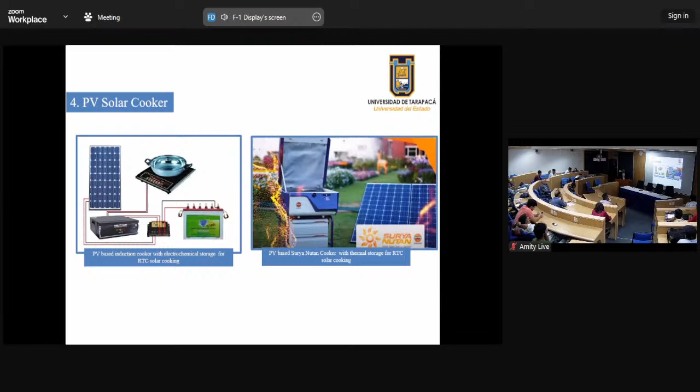Then PV cooking, as we know, PV giving electricity to the induction cookers, and they are generating required voltage and current to get the heating cooking done. Surya Nutan Chulha is one of that type.

Then applications. There are different applications of different cookers: boiling type of cooking, then frying type of cooking, baking type of cooking, roasting type of cooking, and these all have different temperatures. Boiling type of cooking like rice, we have 100 degrees centigrade. For frying, we need 120 to 180. Baking is around 190. Roasting, 200 and more than that.

So whatever the box type cookers or advanced cookers or concentrating cookers, they operate at different temperatures. Box type cookers are generally preferred for low temperature cooking, like 100 degrees centigrade.

Then concentrating cookers, they can reach up to 300, 400 degrees, depending upon their size and shape. Particularly when used for community cooking, the temperatures can reach around 400 degrees centigrade, depending upon their size and shape. Then advanced RTCs, there is again no limitation for getting the temperatures.

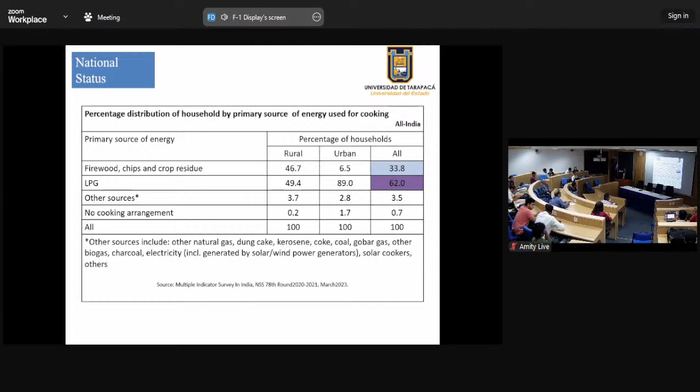Other sources like natural gas, dung cake, and kerosene are also used for cooking. So what are the attractive features of the solar cooker? Why is it important in today's era of decentralized energy solutions?

A lot of people are now working on solar cookers. They are trying to develop different designs. Different designs are available, different geometries, different shapes, as well as different types of cooking pots are being developed. So we have attractive features related to solar cookers, as these are, what we can say,

it belongs to the sustainable development goals. Gender equality is one of the major concerns. There is no limitation; both women and men can cook. Then it checks deforestation; it will reduce deforestation. Then carbon credit for cooking is available.

Even United Nations Development Programme is funding different cooking programs all over the world, including India, Latin America, all African countries, all Arab countries. These types of incentives are available. Reduce household air pollution. The Ujjwala scheme was launched by the Government of India for that purpose only, to reduce indoor pollution.

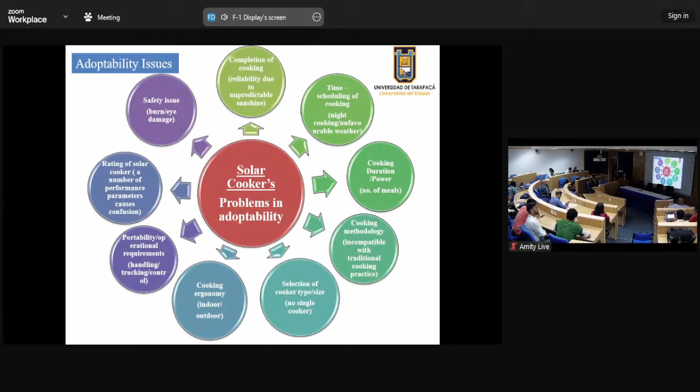Then most important, how to rate and grade these cookers. Even though all types of designs are available in the market, the parameters available for testing solar cookers are at low temperature only. We will see in the next slides.

Indian Prime Minister Narendra Modi ji sees a big opportunity for solar cooktops in India, officially endorsed by flagging off Indian Oil's patented Surya Nutan Chulha, and they are now transferring the license to different people for that purpose.

So what is happening with this? All these types of solar cookers are available. Profitability and portability issues are there. Despite that, there are different parameters available for rating and grading solar cookers. Thermal performance parameters are used to evaluate the thermal performance of different designs of solar cookers: box type, dish type, and panel type. TPP enables users, manufacturers, and the research community to identify a cooker according to a unique number.

Again, we know cooking is a physico-chemical process, and it occurs over a fixed temperature. If we take rice as a food, which is the largest food consumption all over the world, rice is available in every part of the world. So the pasteurization temperature of rice is 69 degrees centigrade. If a cooker is not reaching 69 degrees centigrade, then that rice cannot be cooked.

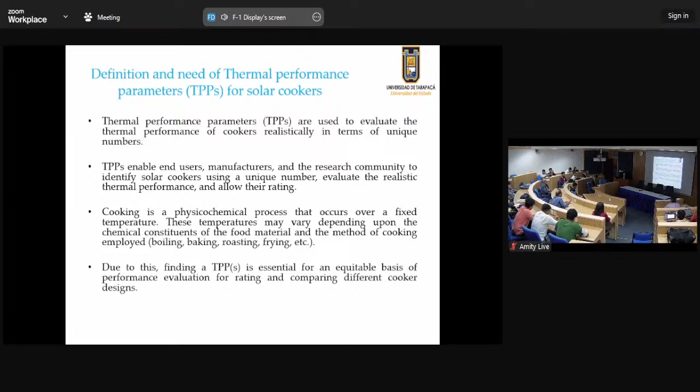And again, cooking time and type of design required depend upon what type of cooking we are doing. If we want to fry, if we want to roast, if we want to bake, the temperatures are different, as I indicated. Due to this, finding thermal performance parameters is essential. For an equitable performance evaluation and rating of different designs, we need different performance parameters. So what are these parameters available in the published literature?

First, figure of merit, F1 and F2, developed by Professor Mullick from IIT Delhi in 1987. These are available for testing box type cookers. Then cooking power, standardized cooking power, developed by Professor Funk in 2000, and it is converted into American standards and ISO standards. Then, as we know, all solar collectors can be tested with thermal efficiency.

Then we need a time for cooking. Again, there are three different times. Pasteurization temperature time is different. Simmering temperature time is different. Cooking temperature time is different. So time is one of the parameters that we can consider. Then heat loss and heat loss factor, optical efficiency factor, concentration ratio, all these parameters need to be taken into account while testing the performance of solar cookers.

And the parameter that we developed is called the cooker opto-thermal ratio. It was invented in 2012 by our team, my professor. Then there are different objective parameters also. First is maximum achievable fluid temperature: what maximum temperature can the cooker reach on a given day? What is the reference time, the time required for a given cooker for cooking? That may be boiling type, baking type, or roasting type.

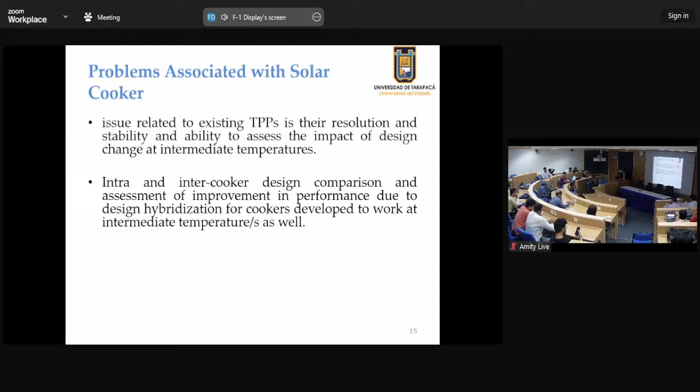Then again, quantification of test load. Whatever test standards we showed, figures of merit, heat loss and optical efficiency factors for dish cookers, cooking power, different standards give different quantities of test load to be used in the cookers. According to the figure of merit box cooker standards followed by the Bureau of Indian Standards, they suggest 8 kilograms of load per square meter aperture area of the cooker. Then the cooking power standards, regarded as an ISO standard, suggest 7 kilograms of water as a test load.

Then we developed CCOR, the cooker opto-thermal ratio. We are taking load as 2.5 kilograms of water according to different conditions. That is why quantification of test load is important in solar cookers. Why is it important? The higher the load, the lower the temperature limits reached for a given cooker.

So one person is using 4 kilograms of water, another person is using 8 kilograms of water, and the heat transfer characteristics definitely change. The same cooker can give different parameters. That is why uniform loading of a cooker is important. It justifies appropriate quantification of the test load for a given cooker while measuring and calculating the test parameters.

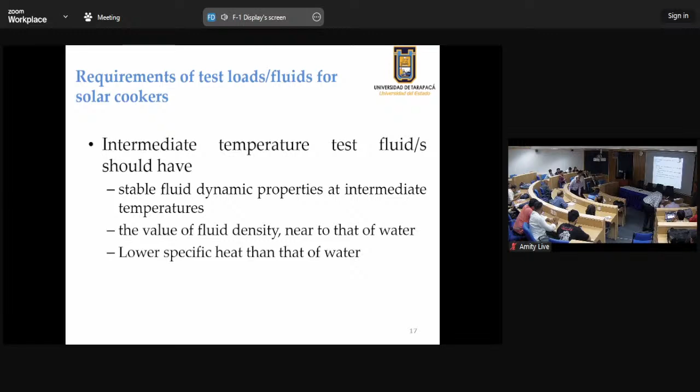For that purpose, we need fluids that have stable thermodynamic properties at low temperature as well as high temperature. It should have specific heat capacity less than water so that resolution can be visible, and the fluid density should be near that of water so that it can maintain the density throughout the experimentation.

So I discussed this according to CCOR, which we call the cooker opto-thermal ratio. We suggested load to be taken in heat capacities, not in kilograms. So according to CCOR standards, 10.46 kilojoules per degree centigrade per meter square aperture area is the load suggested, and it is named specific sensible thermal test load, SSTL.

Why is it taken? Initially the load is calculated in terms of water, 2.5 kilograms of water times the heat capacity of water. It goes to around 10,500 per meter square aperture area. Then we kept the heat capacity the same and reported two new test fluids which have stable thermodynamic properties at intermediate temperatures. First is diethylene glycol, second is glycerin.

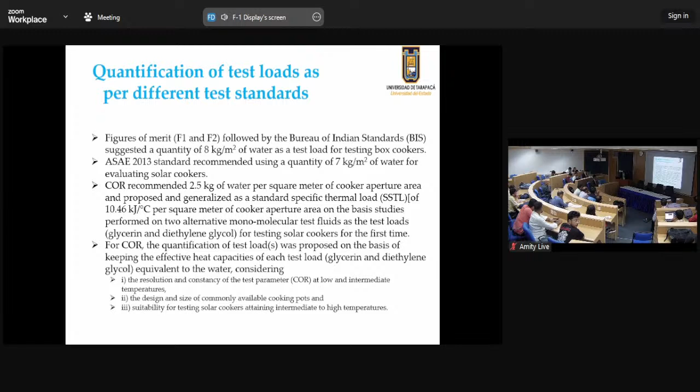These two fluids are monomolecular fluids. They can be manufactured anywhere in the world, and they have stable thermodynamic properties at low as well as high temperature. But later we found diethylene glycol has some toxicity, so we dropped diethylene glycol and concentrated on glycerin as a test fluid for testing different designs of solar cookers at low as well as high temperatures.

Then what are the limitations, or some comments about figures of merit? What is happening with the test parameters for the cookers? These figures of merit are being used for hybrid cookers, though the test procedures given by the Bureau of Indian Standards and Mullick sir don't suggest use of F1 and F2 figures of merit for hybrid cookers.

Now cookers are being made with thermal storage, with some electrical backup, some other type of system, and they are being tested with the figures of merit, which gives a wrong quantification for a given cooker, because whatever hybridization we are doing is not taken into account while testing.

The same is the case for dish cookers. Dish cookers are being tested with the no load test, that is figure of merit one, suggested by Professor Mullick and adopted by the Bureau of Indian Standards. It is a no load test, to be taken with a bare absorber plate of the box cooker. And despite that, dish cookers are being tested with the no load test, F1, F2. Again, it is misguiding the research community.

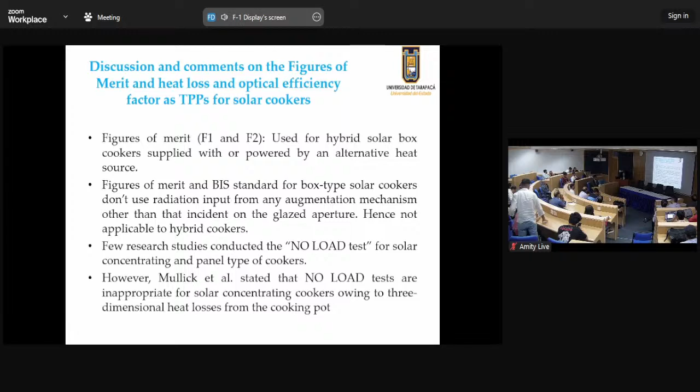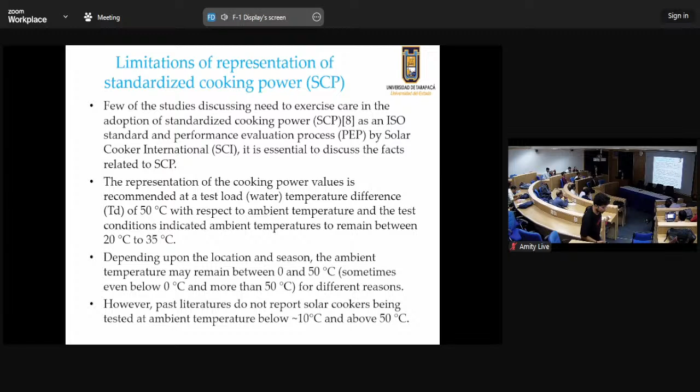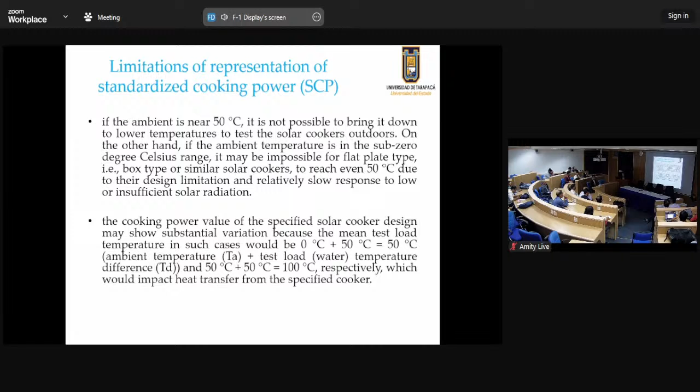So there are different limitations for the cooking power. On this we wrote one article recently in Sustainable Energy Technologies. You can refer to that. Because of time limitation, I am moving fast.

Energy analysis: I said we have to take maximum and minimum efficiency for a given cooker or a given thermal collector, because efficiency is mainly dependent upon the temperatures. At low temperature, high efficiency; at high temperature, low efficiency, that we know. So it cannot be used as a thermal performance parameter for the cooker efficiency. Same as F1, F2, figures of merit, then heat loss and optical efficiency factor, cooking power, all are defined at low temperature.

It is causing non-uniform, inconsistent use of the test procedures for determining the TPPs, resulting in anomalies in solar cookers, and subsequent rating and grading of the solar cookers and standardization. For that purpose, we have defined a cooker optothermal ratio. It is a ratio of optical efficiency factor to the specific heat loss factor: F' η0 divided by F' UL / C. F' is the heat exchange efficiency factor.

It has been developed based on a single step procedure. You can use any fluid, water, glycerin, glycol, oil, and you can test a cooker. But generally, as indicated to you, glycerin is preferred as a monomolecular test fluid, which has a boiling point of 290 degrees centigrade. And with that, anyone can test any type of solar cooker reaching intermediate temperature of 120 to 300 degrees centigrade.

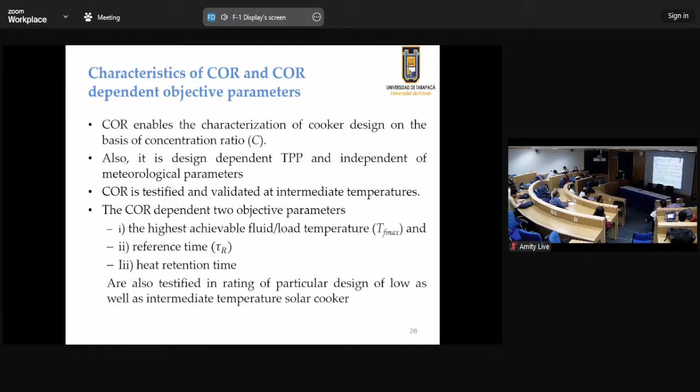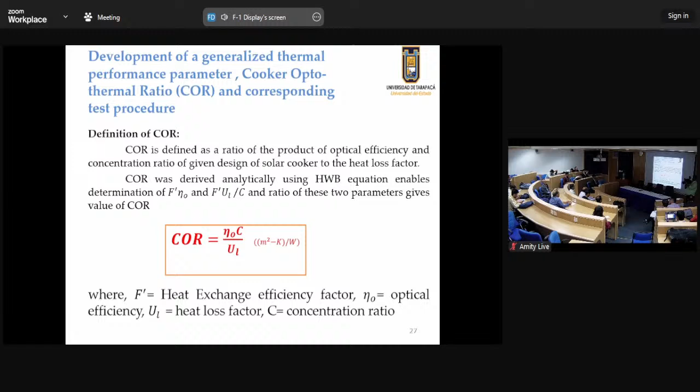So what are the characteristics of the COR? Here you can see C is coming into the picture. C is the concentration ratio. Once the concentration ratio comes into the picture, you can use this parameter for any type of solar cookers. Depending upon COR, we define different objective parameters: maximum achievable fluid temperature, then reference time, then heat retention time, then levelized cost of cooking meals, and carbon mitigation potential.

Based upon COR, you can test and evaluate a cooker holistically, because it is giving all types of parameters. It is giving maximum achievable fluid temperature theoretically, and you can validate it experimentally. Same is the case for levelized cost. Same is the case for carbon mitigation potential. All these parameters use COR as a test parameter for the solar cookers.

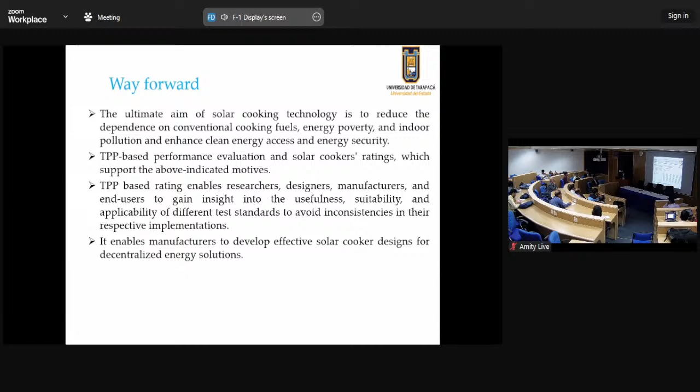So this is the way forward, future works that we are planning now, to identify and find new pathways for COR for advancement in future existing designs and hybrid cookers. Now we are going to apply COR for hybrid cookers, maybe with electrical backup and some other hybridization techniques like heat transfer fluid based cookers. Also, we are trying it for Scheffler. Then to enhance the use of COR to the research community, product designers for appropriate rating and grading of solar cookers, to develop standards based on COR.

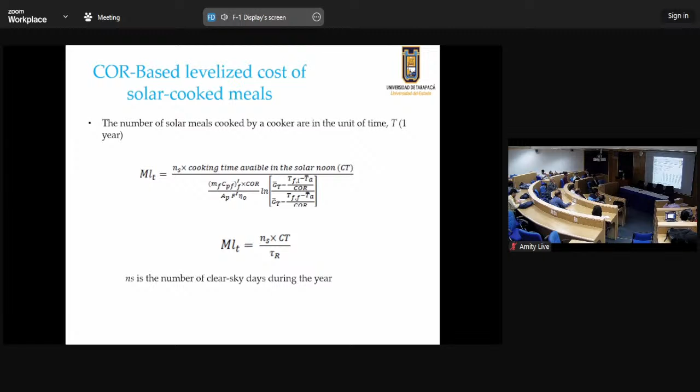Yes, sir. Yeah, yeah. Yeah, yeah.

Yes. Where in the equation of COR, we are COR basically depends upon COR is derived from HWB equation, Hottel-Whillier-Bliss equation. We have the G value there, GT value there. Yes, exactly, the temperature difference divided by G.

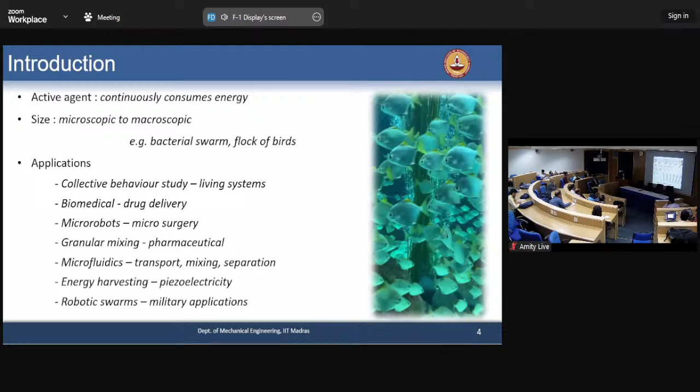When we talk about passive systems, this means they don't have any self-propelled force, so they will not move by themselves. They can move due to the presence of other active agents, but they will not move directly. That's why there are systems which are a mix of both active and passive particles or passive agents.

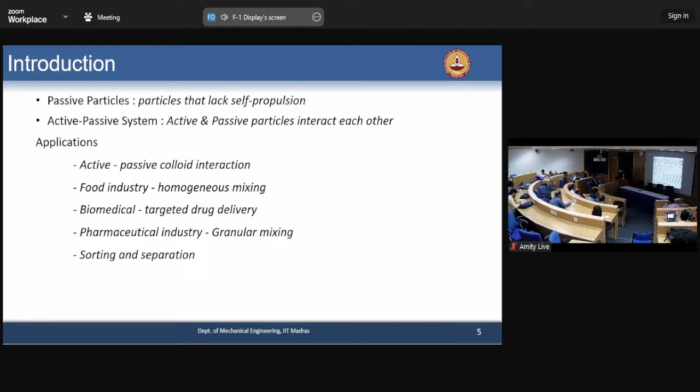So there are systems like active-passive colloid interactions, like in the food industry for homogeneous mixing using robots. For biomedicals, like targeted drug delivery, cargo delivery; and for the pharmaceutical industry, granular mixing, sorting and separations are a few examples of that.

When we talk about all these systems, there are a few system characteristics we have to discuss. One is self-propulsion, how these agents are moving. And when these agents are moving to show collective behavior, they have to align with their neighbors. There will be alignment with the neighbors, and there can be attraction among the constituents, or it can have some repulsion. It can have some resistance against the propulsion.

Mostly in nature these are stochastic, so there is stochasticity involved. It will not align perfectly, so there will be some noise.

When we talk about system behavior, we will see collective motions like swarming. There can be phase separations - if there are differences in speed or differences in sizes, we can see some phase separations among the active systems. There can be localized cluster formations, segregations or aggregations, or sometimes we can see mixing.

There are different models available. One classical model is the Vicsek model. Then there are active Brownian particle models, or ABP models, when we talk about Brownian dynamics. There are run and tumble models, particularly when we talk about bacterial motion - if we want to model it, we generally use a run and tumble model, so if the bacteria runs for some time, then it tumbles, then runs again, and so on. There are active nematics, Toner-Tu models, social force models, etc.

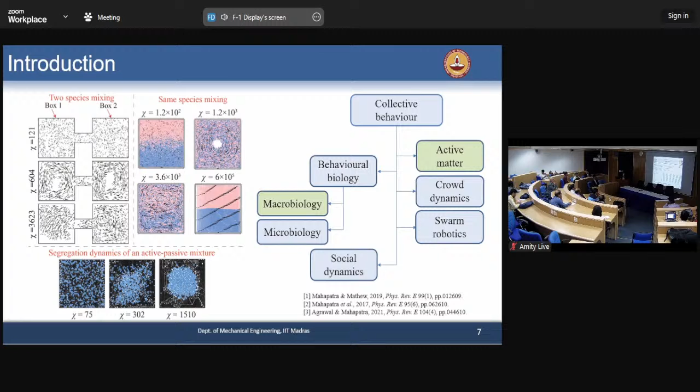We worked a little bit on crowd dynamics, but today I will not talk about crowd dynamics - though if you're interested, I'll be happy to discuss it. So regarding the model, mostly I will talk about numerical modeling here.

The experimental part I will not show today.

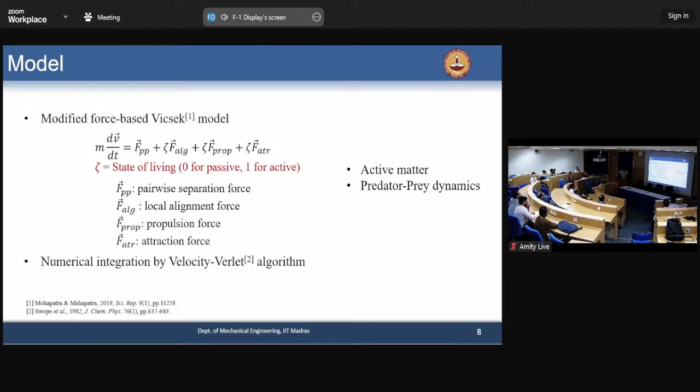So this is a modified version of the Vicsek model, where there are two states, because this is a generic model, so we can include both living as well as dead systems, like active and passive systems. So this parameter zeta will take care of that.

So the main forces are pairwise separation force, local alignment force, propulsion force, and attraction force. And we integrated this using a velocity Verlet algorithm, something similar to what we generally use in molecular dynamics.

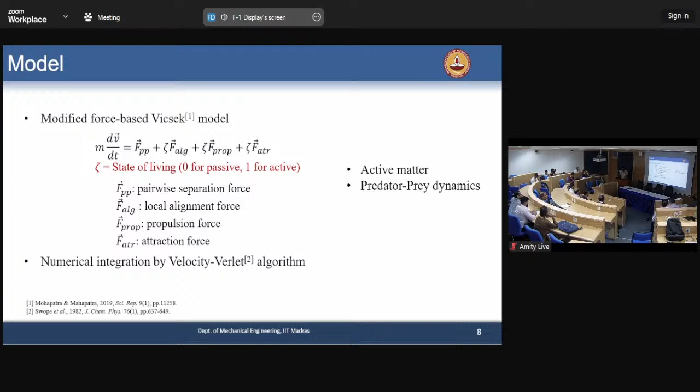So this mainly we talked about active matters and predator-prey dynamics. I will talk about this predator-prey dynamics in detail afterwards.

So regarding the propulsion force, when we have a single active system, then it will have only a cruising state. But if we have, let's say, a predator in the system, then it will have both a cruising state and an escape state for the prey, and for the predator it will have a pursuit state. That means the predator will chase the prey, and due to that the prey will escape. So it will have a different velocity compared to when it is in cruising state.

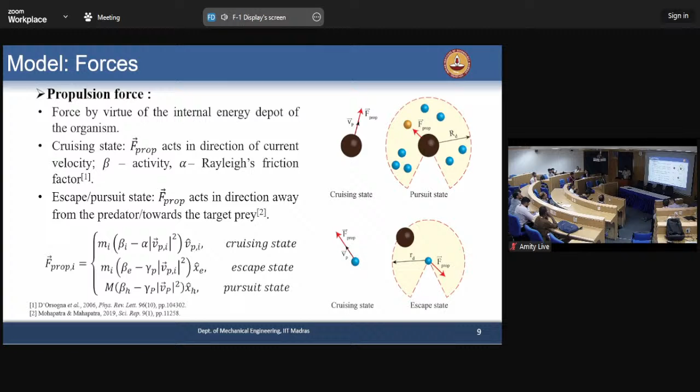And now if it is a pursuit state for the predator, it will chase the prey, so it will align towards the prey. If it is an escape state for the prey, it will try to move away from the predator. If we remember this, I think we'll be able to discuss this further.

So now there can be an attraction force. This is not important when we talk about only an active system. This is important for a prey group, for an isolated prey to come into the prey group. So let's say a prey which is becoming isolated in some situations, it will come back to the prey group. That's what these forces, the form of the forces, has been taken from different experimental papers. So they observed this in nature, and based on that, these forms have been taken.

There can be a pairwise separation force. This is particularly important for a biological system, so that they will not overlap. It's like a soft disk, so if they overlap, there will be a repulsion force. And this will work only when there will be a possible overlap, otherwise this will not work. So it's like a pairwise interaction. If it overlaps, then there will be a repulsion force.

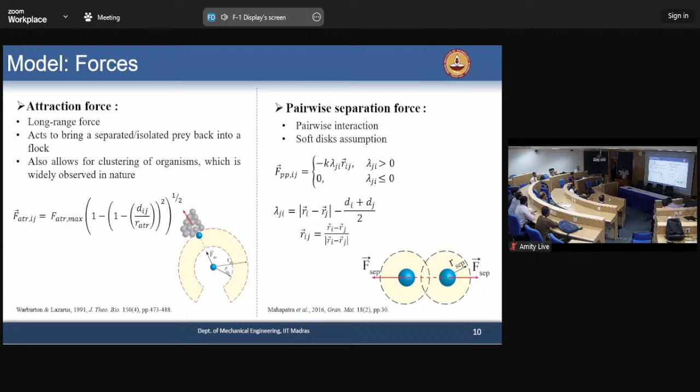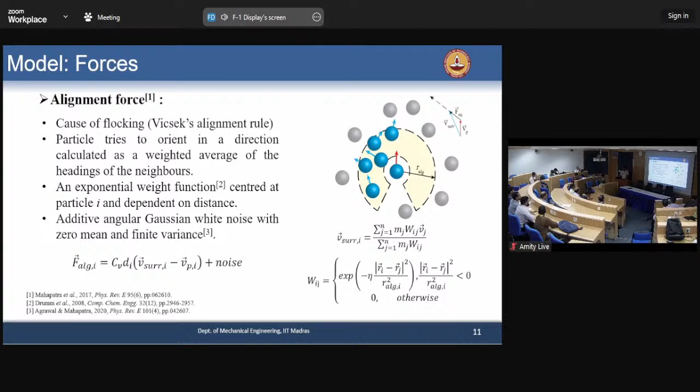So now if we try to understand what the control parameters are, because there are a lot of variables. If we try to understand what parameter we can control, so that there will be only one or two parameters which we can modify and try to see the overall behavior.

So first, if we compare the alignment force with the self-propel force for a single particle, we can write an equation like this. And now if we do a scale of the slip velocity, the velocities can be scaled as m beta by dCV, and finally we get a scale parameter. This is like an alignment force to the inertial force. So this will give the relative importance of the alignment compared to the inertia of the particles.

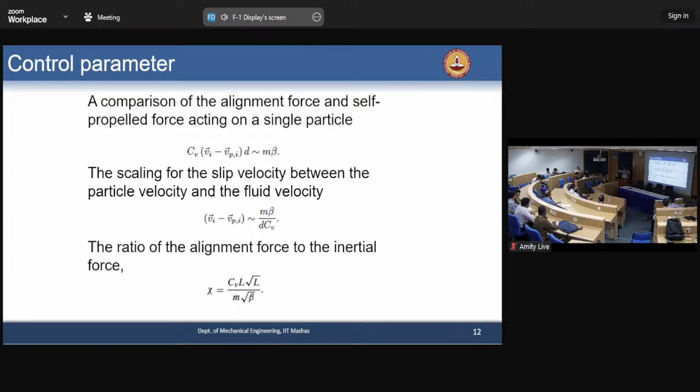So this parameter chi we are varying in our simulations, and we are trying to see whether a completely random system can be brought to a collective motion. So that's what we started with. Say for example, for a very low chi value, you can see it's like thermal motion or Brownian motion initially. But when we increase chi, you can see the second panel where it shows some rotating behavior.

It's called milling. This type of behavior has been observed for bacteria when they are confined in a system. All these simulations have been done in a confined system, so there is a boundary. Due to this effect of the boundary, it started rotating. So you can see we can have a single mill or a double mill depending on the regime; this is a very unstable situation, that is 3.6 into 10 power 3. In that regime, we have an unstable system which will show a double mill.

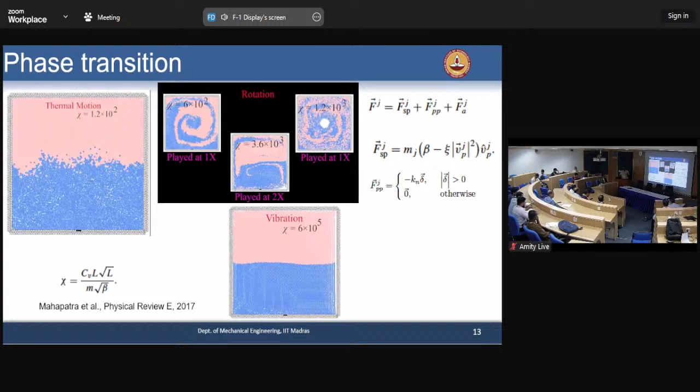And if we increase chi further, it will align so much that it will just oscillate. It is like a vibratory motion in the system. So here mainly we have considered the self-propel force, a particle-particle repulsion force and the alignment force, and the form of these forces is the way I have discussed before. So this is what we have seen.

These are the particles. All are the same particle, all are active. Just to understand how it is mixing within it, we have given a blue and pink color. And these are the velocity vectors drawn on top of it. So you can see initially it is all random motion when chi is very small, and slowly it goes into a milling motion, and finally it is just oscillatory motion within the wall.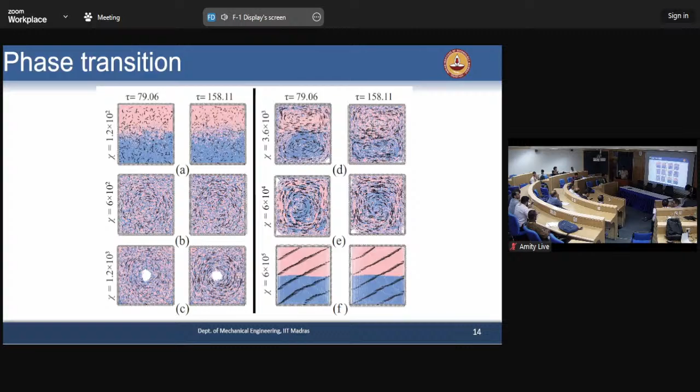So after understanding this, that it is possible to create a system which goes from Brownian to oscillatory with milling in the transition, we have done a little more detail of that. I am not going into that. So we want to see how the behavior will change if we have passive particles, whether it will be able to mix because of these active particles, or it will show some other behavior.

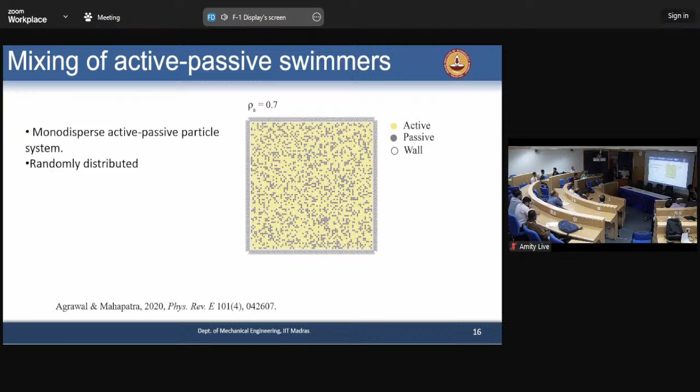So this is a monodisperse system. We did a polydisperse system also, but here I am showing only the monodisperse cases, where the gray are the passive particles, yellow are active particles, and these are the wall. So this is also a confined system, and these are randomly distributed, and these are the scaling parameters, everything I have shown before, the similar chi parameter, so only one parameter we will change, and we will see how the behavior changes. What we have observed is something similar to before.

If we increase chi, it will coordinate well, and it will show a collective motion. From random motion initially at a lower chi to a very coordinated circular motion at a higher chi. So at low chi we will have a random motion phase, at higher chi we will have milling motion, and at very high chi we will have a kind of oscillatory motion. So the behavior is almost similar, although the values will change at a critical chi where it transitions from random motion to milling motion. But otherwise the behavior is almost similar, whether it is a pure active system or an active and passive mixed system.

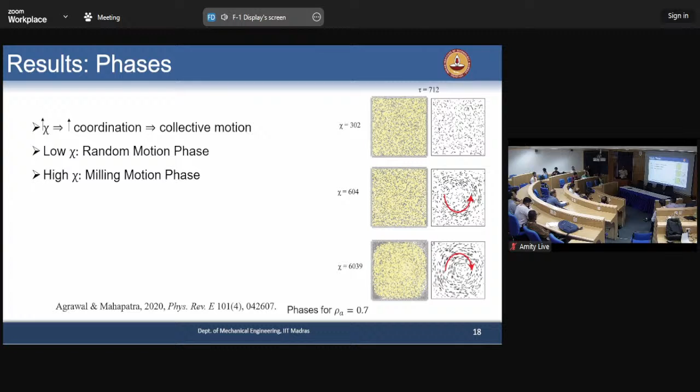So then we try to understand whether we can see the phase transitions. Can we quantify the phase transitions? So we converted from a Lagrangian based system into an Eulerian system and calculated the viscous dissipation, because we know the velocities. This is an established way of identifying the dissipation rate with time. This is not something we have done for the first time; there are papers before, so we have taken it from there. What we have identified is that this random motion changes to milling motion at a critical chi, and we call it chi c.

So if it is less than that chi c, it will be a random motion. If it is more than that, it will be a milling motion. And this is a first order transition.

So to identify whether it's a first order transition or a second order transition, we have to run simulations with a varying chi. So for example, we go in the forward direction by increasing the chi, and then we come back by decreasing the chi in different simulations in steady state cases. So you will see a loop, as you can see in the inset.

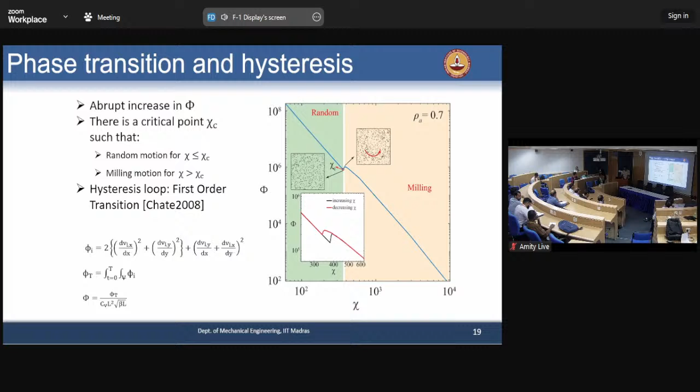So if you can see a loop or a hysteresis in your control parameter or order parameter graph, then this is a first order transition, which has been reported earlier, Chate in 2008, that you can identify that as a first order transition.

So after doing this, we try to see, okay, we have added some active particles with different passive particles. Can we change the packing fractions of the active particles, and does that have implications for the overall transition? And it has.

So if we decrease the active particle concentration, the critical chi that changes the random motion to the milling motion goes up. And if we decrease it, the overall effective alignment also decreases, and we can plot that chi c based on the effective rho. Okay.

So now after understanding this as an active system, we thought to understand what will happen to the behavior when there is a predator, because now the system will be much more complex, because we have all active but of different types. One can consume the other, or even if we consider a non-consuming predator, it can kill it. So it will be initially all active, but it will become passive when it is killed.

And we are mimicking situations where it is a continuous attack or a sustained attack. It's not a single attack, but a sustained attack by the predator. So if you see this video, this is a fish school where there is a shark, and this fish school is avoiding the shark. So this motivates us to do the simulations.

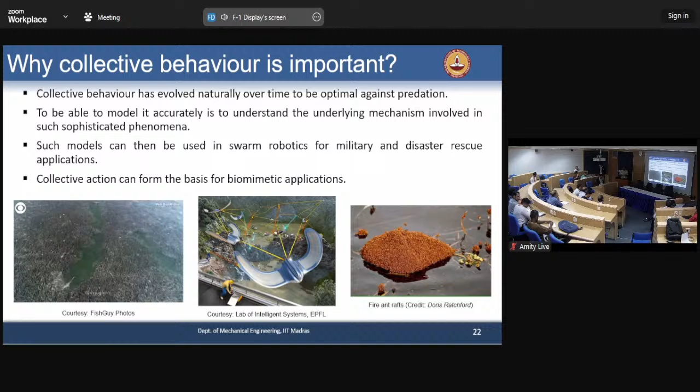For example, these fire ant rafts on the water: they collectively come together, create the rafts, and cross the rivers. So in these cases, as I said, it is slightly more complicated because we have a predator. So there are different zones of attack and zones of identification of the prey.

So for a predator, there is a zone of killing surrounding the predator, and it has a zone of detection in which it can detect the prey. It cannot detect the prey everywhere in the domain. For the prey, similarly, prey can also detect a predator. Prey has an alignment zone in which it will align with the neighbors. It will not align to very far away prey. It will align only up to a zone.

And to mimic it as close to the natural system as possible, it will not have 360-degree vision, but will have a blind angle. So we have given a blind angle of 60 degrees here, but it's a variable. We change it for different angles. So this is our basic algorithm.

First it will detect, then it will select the target, and it will pursue it. If the target is within the kill zone, then it will be able to kill, then it will have a satisfaction zone, and it will again go back and do the same thing. If it is not able to do that, and the maximum time given for the predator to search is over, then it will have a refocus state, it will wait for some time and then again start that process.

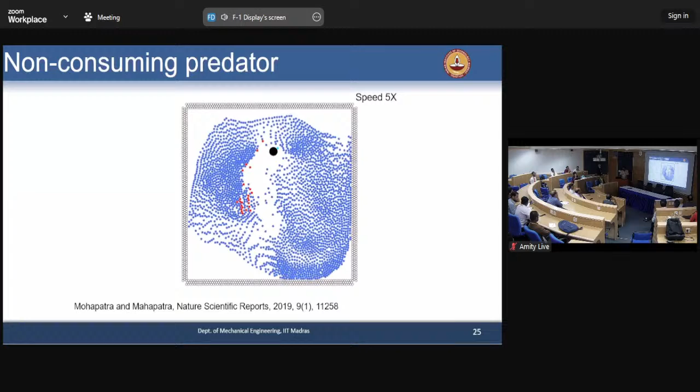So now this is what we have observed. We have observed behavior like split and join. The prey will split and then join back again. It has shown the fountain behavior and so on, which has been observed before in nature, particularly in experiments.

So then we have defined an order parameter, which is a velocity based order parameter, and we have seen that with the increase of chi, it is more ordered, and the overall killing rate changes based on the increase of chi. I will discuss this in slightly more detail afterwards.

So now, how can a predator select a prey? Till now, in single predator systems, we have implemented only that it will select the nearest prey and kill it, which is more common in nature. But there are three possibilities: the predator will select the nearest prey, or it will select the isolated prey, or it will select a central prey.

In the central prey case, it will select only the central prey, and it will try to break the prey group, like what you are seeing in that video of the shark moving in the fishes. It is selecting the center and trying to break it into smaller groups. This is a very common tactic when predators hunt in a group. A few of the predators will try to break the group into smaller groups so that the other members can attack the prey and have more successful killing.

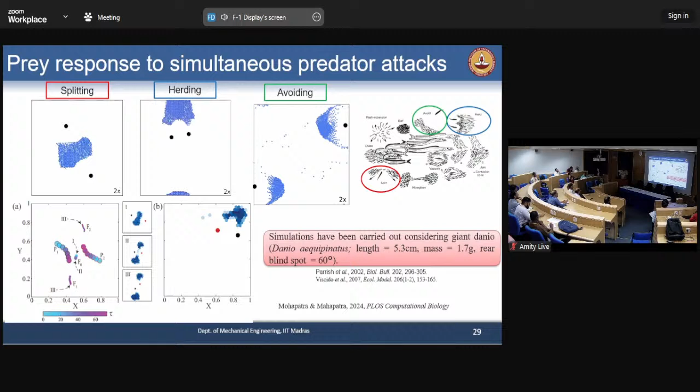It is choosing there randomly with a probability we have given that it will choose either the nearest or nearest central type of thing. And we are simulating a danio fish, which is a variant of a zebrafish. These are the mass and blind spot for that fish. So it has a 60-degree blind spot, so we mimicked that. We have tried to take all the parameters, like actual parameters that are possible.

It started high, this is a part of the simulations where it is in a polarized state, it comes down into a confusion state, then slowly recovers in a recovery zone, and then goes back to its polarized zone again, which we are seeing in the different insets. Because of the time, I am not going into detail, but we can discuss it afterwards. And these are the corresponding velocities of that state. The velocity is on the secondary y-axis and the polarization on the primary y-axis.

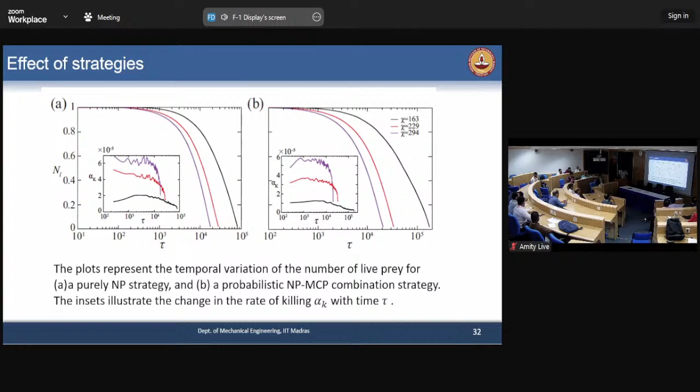So I think I will take just one thing. Now, let's compare what will happen with a single predator compared to multiple predators. We have done only up to 2 predators, because more than 2 is slightly more complicated and takes more time, so we have not done that yet. But what we have observed is it's not additive. The number of kills, or the time taken to kill individual prey with a single predator compared to 2 predators, is not additive. It is more than 2. That is one of the key observations from our study.

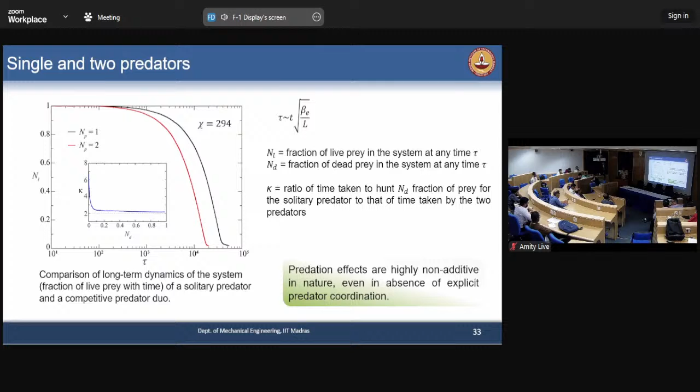Now this is very important, particularly for group hunting. That's why generally group hunting is preferable in the wild rather than single hunting, because in single hunting the failure rate is very, very high. That's why wolves and dogs hunt together. So it can mimic a few of the things we observe in nature. Predation effects are highly non-additive in nature, even in the absence of explicit predator coordination. Currently we are working on coordinating predators, which is slightly more complex, particularly the probability and the stochasticity involved in it.

So in summary, for these flock groups, we have observed that the dynamics of the flock response are quite different in case of attacks by multiple predators. Multiple predators bring in new observables to the system whose dynamics are not well researched, particularly these two-predator systems. There are only a few works, and numerically we are probably the first group who did a detailed study on that. And the effect of predation is non-additive by nature, even in the absence of explicit coordination.

And the superfluous alignment among prey can lead to reduced speed, thereby resulting in higher prey mortality, especially in the case of sustained predator attacks. So for the future, it is more interesting to see, if we have coordinating predators with a sustained attack or some delayed attack, how it will be for the different predators. So that's what we are currently working on.

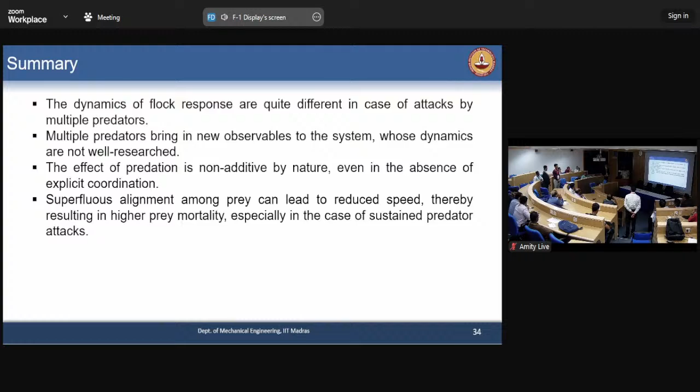Physically, it means how strong your alignment is compared to the inertia of the system or the particle. But that is not an order parameter; that's a control parameter. We change chi and try to see how our alignment changes. The order parameter here is psi, a velocity-based order parameter. It depends on the velocity and on how many unique living prey are in the neighborhood. So that's the order parameter.

This is like a polarization parameter, whether everything is moving in the same direction or in different directions. So that gives the order. There are different types of order parameters we can define; this is one way. You can define a rotational order parameter, particularly in milling-type systems. But for an open domain, or by the way, this is a periodic domain.

We have used a periodic domain here because in nature it cannot be closed. So all these two-predator systems are in a periodic domain. We have done simulations for an open domain also, but that takes a lot of time. Your array size will increase as it goes on, so that is even more.

Yeah, I understand. So my last question is, being a mechanical engineer, how do you correlate this research with your mechanical domain? What is the application?

Applications, we try to connect different applications. One is this predator system. This type of collective behavior mostly comes from physics. When I started this, I was interacting with faculties in physics. Then I got a student interested in physics, and now he is collaborating with others in physics, who are more interested in the fundamental behavioral or ecological system rather than directly an application.

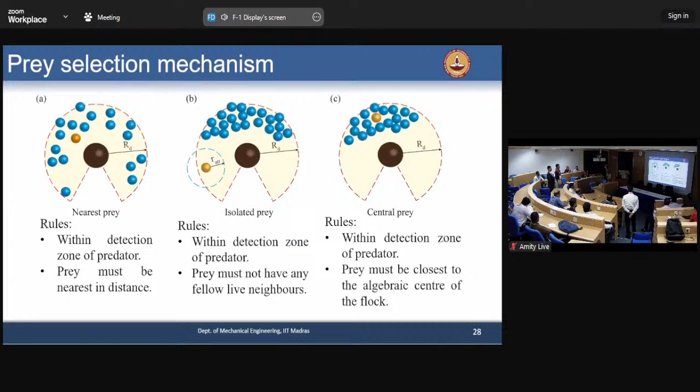But there are applications, for example information transfer, which I have not shown here. We did some analytics of that. For example, a predator, when a prey group sees it, this information is like a visual cue. So the first prey or few who are in the vicinity can identify a predator, and that information will go back to all the groups. This is information propagation, which is very important for news propagation, fake news propagation, and swarm robotics.

So currently we are also working on micro robots, say mixing of passive particles using micro robots, where we can control the motion of the micro robots, so that with a minimum number of robots you can mix it. These are self-propelled robots. There is a group in Sweden building this, and we have developed the model to predict it. Then we have used reinforcement learning to move those robots so that they learn by themselves which direction to move for better mixing. So there are applications we can connect, but directly these are mostly physics based.

Thank you very much.

Thank you, Pallav. It was a nice presentation. Most of my questions, my doubts, you already answered. But I still have one doubt. When you develop the model, most of the things you have to take by observations.

No, most of these observations mean a few of the models are separately available. For example, the Vicsek model is very popular, guiding collective dynamics of birds and other things, but it doesn't consider the effect of predation. It's just the active system, which I was showing in the initial slides. That's how I also started, with a pure active system, how it will move, compared with the Vicsek systems and so on. So direct comparison is a bit difficult.